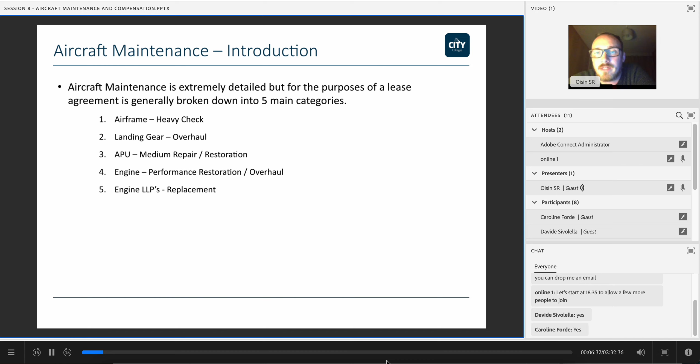And then engine LLPs is the final bit we look at from the lessor side. What that means is, same as I mentioned in the landing gear, there's certain parts that have a limited life before they have to be disposed of. It's one of the crucial parts of engine shop visit management is understanding which LLPs will be replaced when, and just ensuring that we're not short building the engine or throwing away any life, and you're only reimbursing any lessee for what they're actually owed.

So just to start digging into airframe maintenance, the maintenance for the airframe consists of different inspections to check parts for any signs of part fatigue, failure, or damage. General checks are an A check, which is a quick check, doesn't require a hangar. It's generally performed as overnight maintenance, and they follow roughly monthly. Now, different aircraft have different intervals for all of these, so these are just generic assumptions I've made.

A C check is a detailed check falling due every 2 to 3 years, depending on the aircraft and operator. Some operators have what's called an AMP, so that's an aircraft maintenance plan. It's a customized document based on the MPD, the maintenance planning document, which Boeing or Airbus or whoever your OEM produces. This is the lowest level of check that requires access to a hangar. During the C check, the majority of the aircraft will remain intact, but certain inspections will be performed in areas that are not usually accessible.

And then the heavy check, or a D check. The D check is slightly old terminology, but to make it as general as possible, I put this in. This is the heaviest check possible, which can be referred to as a heavy check.

While this check is referred to as a D check for the purposes of a lease, it'll be split out to reflect the check interval as defined by the OEM. For a lot of the examples tonight, I've used Boeing just because it's a quick and easy one. Boeing heavy checks are performed every 8 years, 10 years, and 12 years.

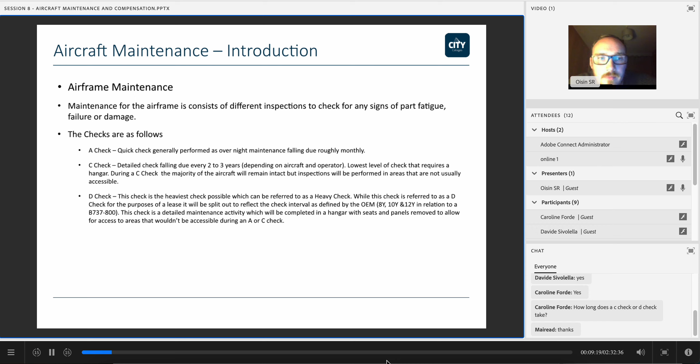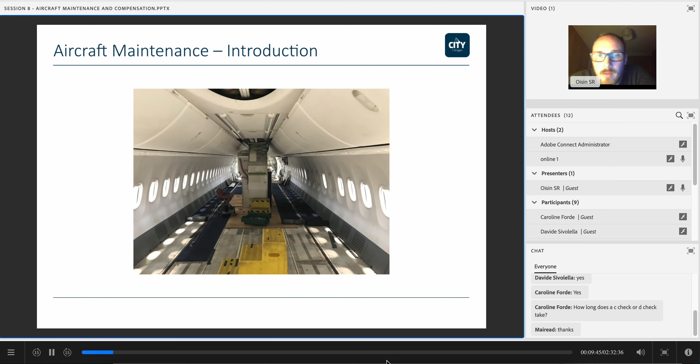So we ended up pulling out the interiors of the aircraft and pulling up the floorboards. And pulling up the floorboards here, and these strut beams, we found several of them cracked.

So while a normal heavy check would take up to 3 weeks, I think this aircraft took about a month and a half, because the level of repairs required to repair these beams was extensive. Boeing had to design the repair, and it took weeks to get material in. So all these items actually add up when you're conducting heavy maintenance.

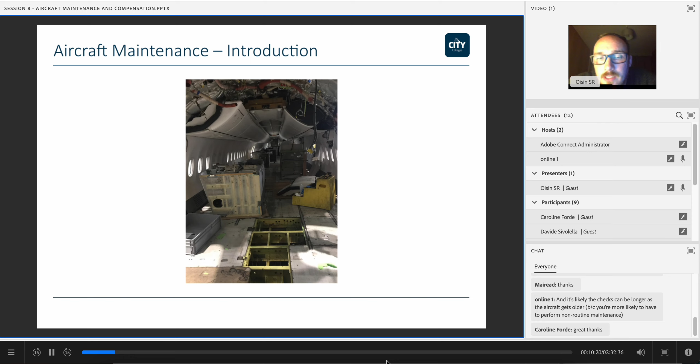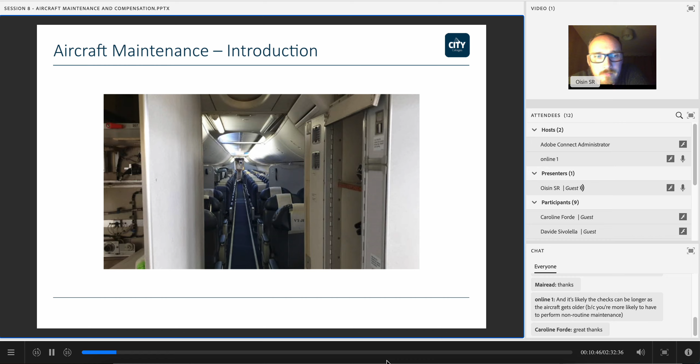So then, after the month and a half, we slowly got the aircraft back together. This is a picture of it shortly before it was ready to fly. You can still see, on the left-hand side of the picture, there's still some exposed cabling and pipes in the back of the galley there. But by the time the aircraft flew, the coffee makers, the ovens, the boilers, everything was back in. So I just wanted to give you an appreciation for the level of disassembly that went on.

So moving on to landing gear overhaul. Sorry, is there a question there? No, sorry, it's coming from Rob. Actually, that was my comment.

Yeah, no, I was just saying that as an aircraft gets older, to Caroline's point, you're more likely to find these sort of faults or issues. So the older the aircraft, the more likely you'll have to perform non-routine maintenance, which will obviously extend the length of the repair of the check. Yeah, basically asking how long a check is - it's how long is a piece of string, it's as long as it needs to be. But yeah, as it gets older, it does get much longer.

Okay, so landing gear overhaul is determined by one of three factors. There's a calendar interval, which is a set number of months that the manufacturers say the landing gear needs to be overhauled in. Also, there's a cyclical interval, and that's the amount of takeoffs and landings allowed before an overhaul is required. And then obviously the damage.

So if, I don't know, a luggage cart drives into the side of a set of landing gear, that landing gear won't be allowed to fly again. It won't be able to be repaired locally, so it will actually be required to be sent to the maintenance facility.

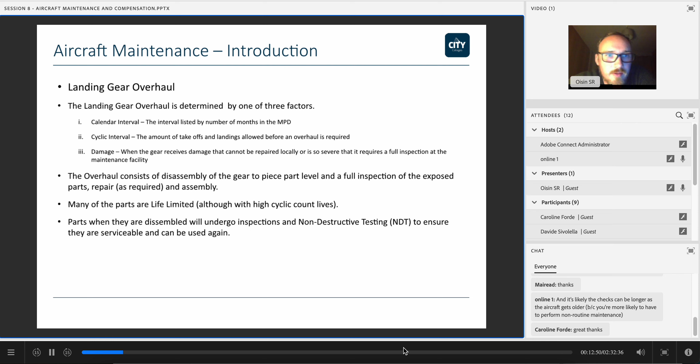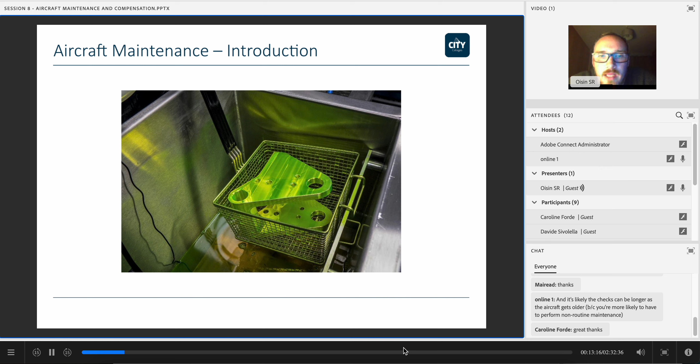What that means is it's soaked in this dye with really low viscosity, so it'll run into all the cracks within the part. When the part's cleaned and there's a black light shone on the part, the penetrative dye will actually seep into any cracks that we wouldn't normally see with our naked eye.

So when the black light is actually put onto the component, you'll see the cracks radiating through it much easier. So it's an easy way of identifying whether something's a crack or just a mark without actually destroying the part or component.

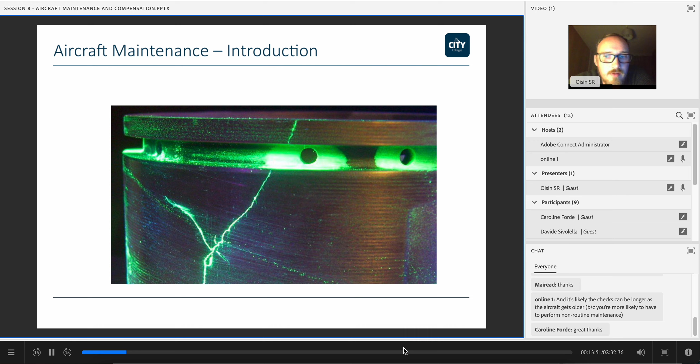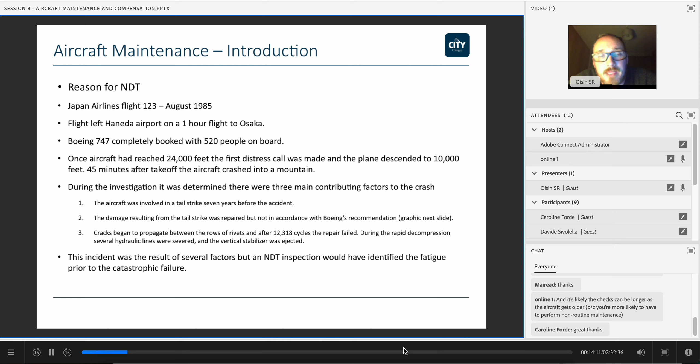I've included a bit of a case study here. Back when I was being first trained up in aviation, one of the big things they actually did with us was they kept giving us different incidents and reasons for the way we do things today. One of the reasons for NDT and being an advocate for good repairs and quality...